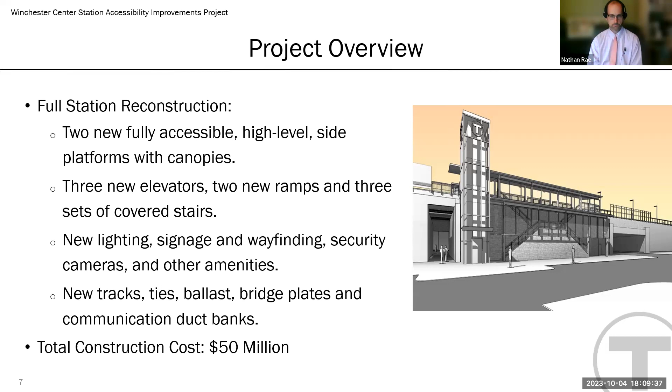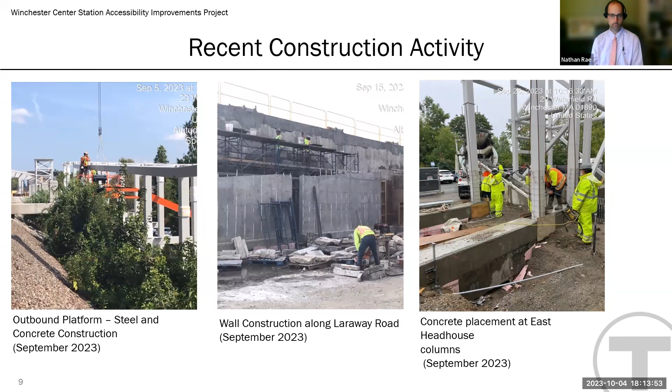Project schedule. Well, construction work is ongoing, as you know, and we are committed to completing this project as efficiently and effectively as possible. That being said, there have been some delays that we want to share with you, the public. In the course of going through the earlier stages of construction, we experienced a few setbacks.

One of these was a conflict over interpretation of plumbing code. Unfortunately, that necessitated two lengthy variance talks with the plumbing board, and unfortunately this resulted in some lost time, some key lost time in the project.

In addition to that, we've experienced some supply chain issues. These are, for the most part, behind us now, and we do have the necessary equipment and fabrication offsite of key parts and pieces that we need to complete the station. We'll see delivery of that in the next month.

And so we've had those issues, and in the network of commuter rail, there are times when projects are affected by projects not even on the same rail line. Such is the case with Winchester. It was affected by major work going on at a neighboring MBTA commuter rail line. There was major signal work going on, all up and down that line, and many trains had to get diverted through the Winchester line. Unfortunately, what that means is there's delay and limited access to track level where a lot of the work needs to happen, and it becomes a safety concern with so many trains, increased rail traffic.

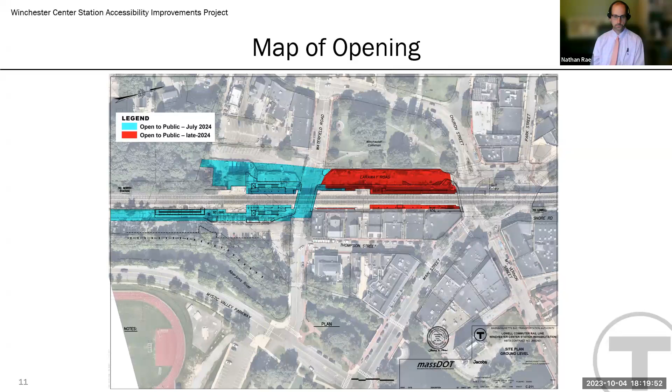So looking ahead for this fall, what should you expect? You will see more continued steel erection going up. Moving north around Laraway Road, you'll start to see that. You'll see electrical work, as well as more concrete and plumbing work starting, and site drainage happening.

Electrical, we're bringing in a new electrical service. That's a major part of this project. That'll be happening in the roads and areas around the station. We will be focusing on the Waterfield lot, and then moving further east, on the Aberjona lot, where this steel work will be happening.

A lot of our work efforts are focused on the elevators. Those are a major, critical path item. They take a lot of time, with lots of components and safety checks needed before an elevator is open to the public. So getting those elevator shafts started as early as possible - you see the shafts are up already. Next step is to enclose them with glass and roof, and then all the machinery inside the elevator can be installed.

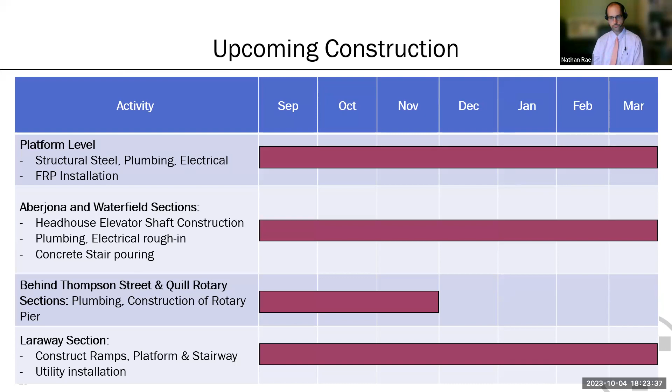For project contact information, please continue to email or call the construction hotline, and the project website is available there. We look forward to any questions.

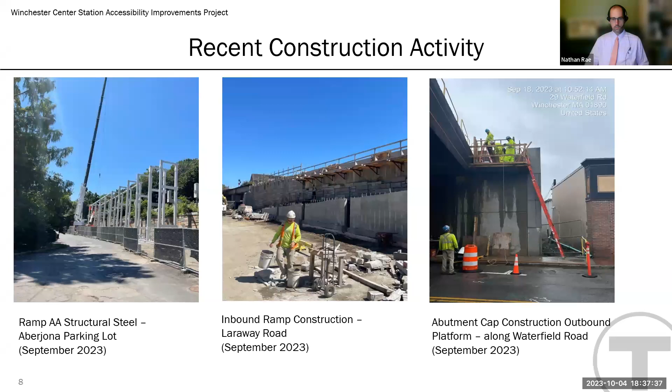Which I know was covered a little bit in the presentation, but Nathan, if you want to clarify again, the opening and when construction will be completed. I think that bears repeating. Sure. So in July 2024, next July, we are committed to what we're calling a partial station opening. And that will be not a full train length. It'll be maybe 3 or 4 coaches operating on a section of the platform. And so there'll be elevators, ramps, stairs, like a normal station. Only half of the lengths of both sides of each platform will be open for service.

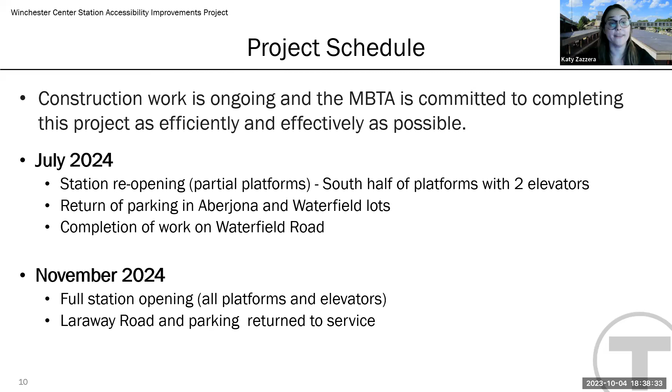So after July 2024, construction is still continuing up till November 2024, at which time we're planning, anticipating and forecasting that the full station opening will be complete. So in November 2024 is when the station will be finished construction. Okay, thank you for clarifying that. I think that was helpful for a lot of people.

Again, I would invite people, if they want to raise their hands to ask a verbal question. We do have one other written question from a person called SM. That's all I can offer. So whoever you are, SM says, will the ramps be ADA compliant, just in case the elevators were not working for a time? Thank you. Yes, the ramps will be ADA compliant. They're built with the latest code for the slopes of those ramps. They're not as steep as the ramps that were there before. So yeah, there will be 2 ramps there, one on each side.

And you have the terrace, right, where it's at an ADA compliant grade, I believe, if I remember correctly. Correct, yes. The slope meets all the ADA requirements with the pauses and the benches, and it's a switchback, so it comes back the other way. So it meets all those requirements. Okay.